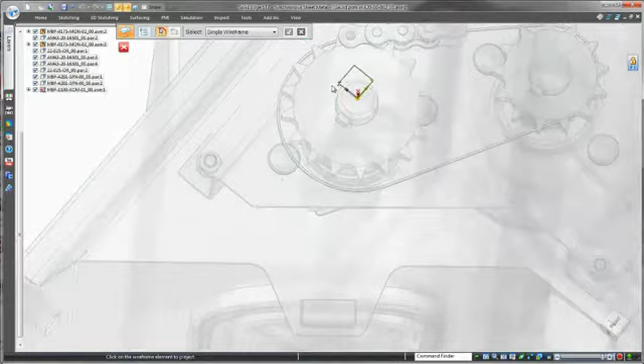Watch as construction of the safety guard begins as a sketch, referencing geometry from the adjacent product structure. Once we have a region encompassed by these curves, we select it to create a sheet metal tab. Solid Edge automatically assumes that a tab is the basis for sheet metal work, so no specific command is needed.

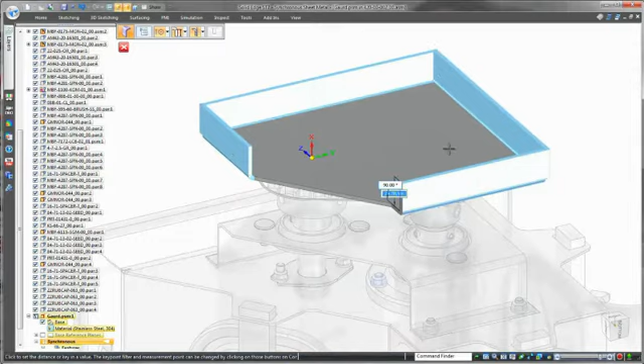Continuing to lean on the inherent intelligence within Solid Edge, we'll create 4 flanges by selecting and simultaneously dragging appropriate thickness faces, using a corner point from another component to define the flange length. Again, work directly with geometry. That's creation in Solid Edge.

We'll quickly define a jog to prevent interference. Solid Edge commands are intuitive and fast. Partial flanges can be defined and customized via the innovative heads-up command interface. Design intent is incorporated by relating faces.

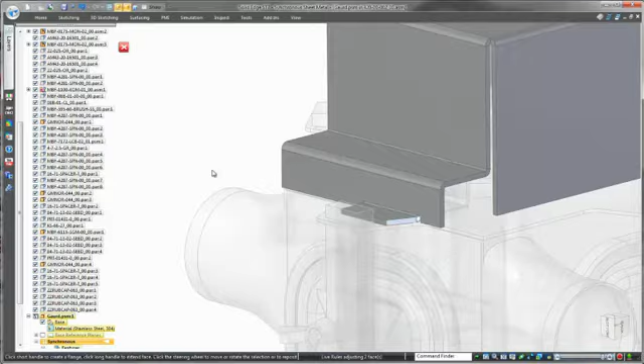When flange sides need to match those from adjacent components, the handy radial menu initiates a simple sequence of picks to get the job done.

Solid Edge makes easy work of reorienting and extending flanges, often removing the need to measure angles and distances. For visual face modification, the handy steering wheel is always available. And when driving dimensions are necessary, it's easy to place them on the 3D geometry and change them as needed.

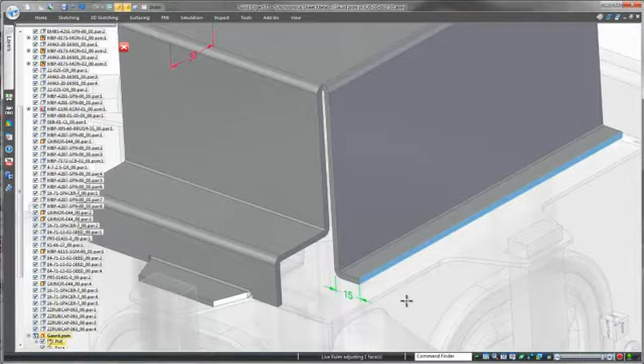Using surrounding geometry, creating sheet metal features like this dimple is fast and accurate.

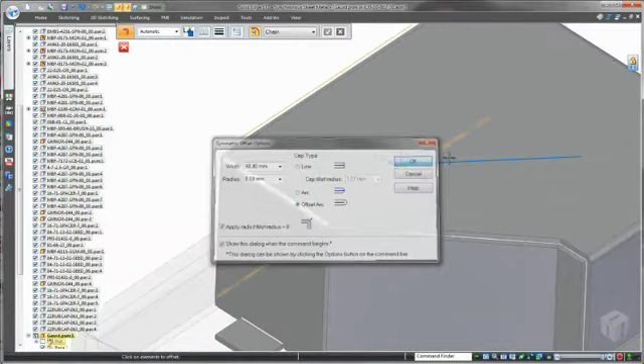For manufacturing purposes, Solid Edge flat patterns always show the most efficient cut sheet size, and that's great for nesting.

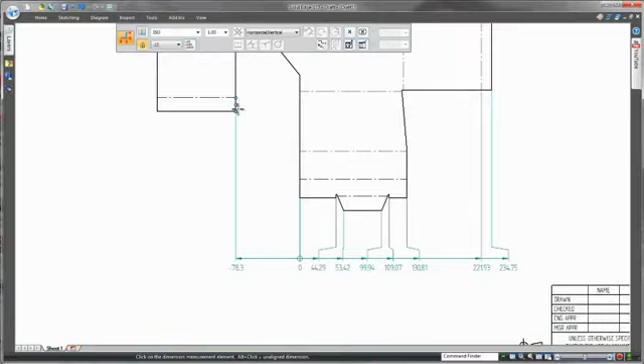The Solid Edge drafting tools facilitate creation of dimensioned drawing views fully associative to the model. Note that as we close the drawing and return to the assembly, the guard is placed in all 3 locations in the meter box. Solid Edge contains a full set of sheet metal construction commands.

Watch as a rectangular to circular plenum in the blower fan assembly is lofted between existing parts.

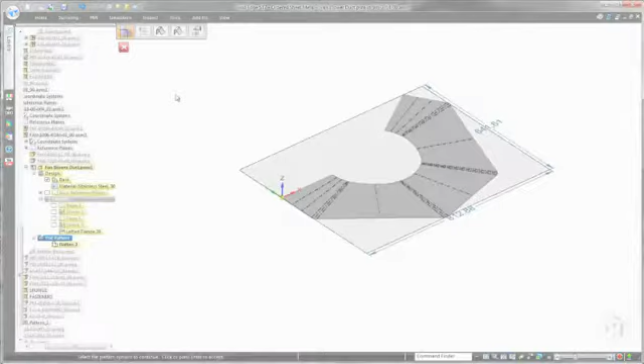Another strength of Solid Edge is the ability to wrap sheet metal around a solid part. This conversion of solid block into sheet metal is especially useful for complex shapes, as solid modeling is often faster and easier. Now that's productive.

To integrate with your CNC machinery, Solid Edge flat patterns can be exported into a DXF format with intelligent layer control.

Direct interaction with surrounding geometry, coupled with industry-leading design tools and innovative modeling capabilities, makes Solid Edge the choice for companies looking for an edge over the competition. Solid Edge. Design better.